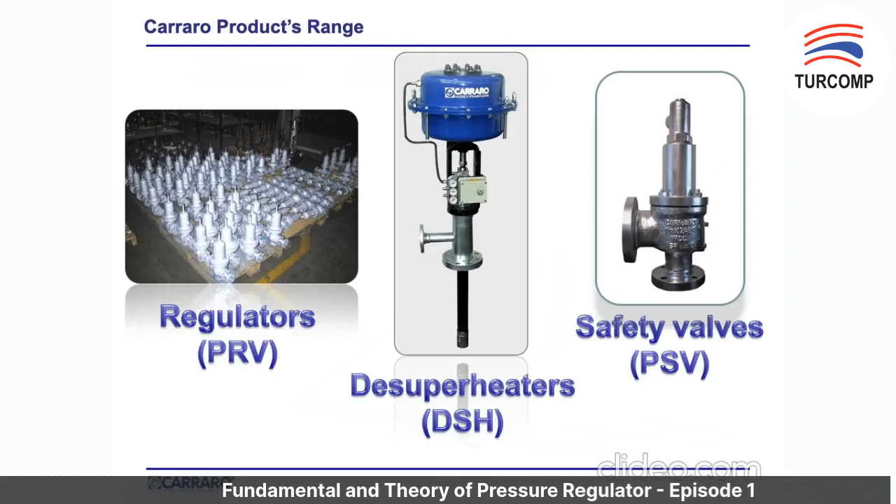The general concepts presented here cover all types of regulators supplied by Carraro. Some models are going to be discussed in great detail, so let's start by saying what a regulator is, and in particular what a self-operated regulator is.

The regulator is a self-contained mechanical device which is activated by the fluid flowing through it, so it's the process fluid. It's a device whose primary function is to match the flow of the medium flowing through it to the demand for this medium placed upon the system.

At the same time, the regulator must maintain the system pressure within certain acceptable limits. They represent essential and crucial items for adequate control of pressure in the plant and its application, especially in markets like oil and gas, power, chemical and petrochemical, and general industry.

Carraro regulators are suitable for each kind of medium, dangerous and not dangerous, like for example oil, aggressive fluids, steam, air, gas, water, and liquid.

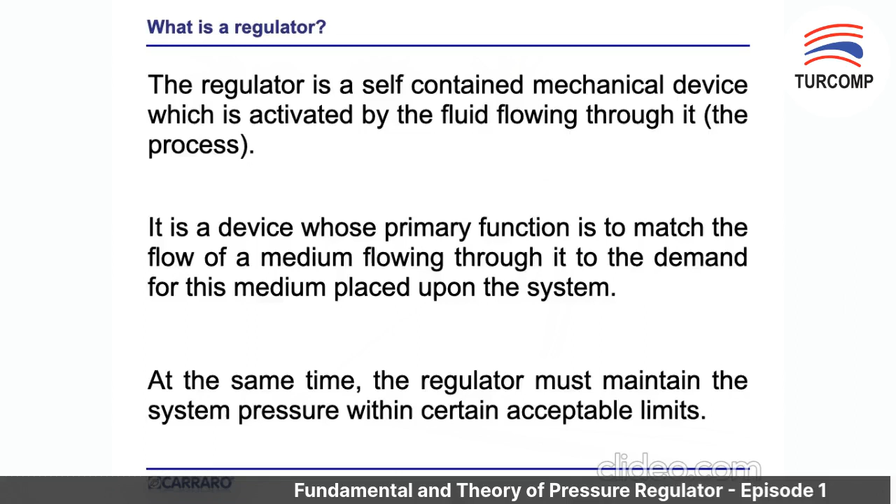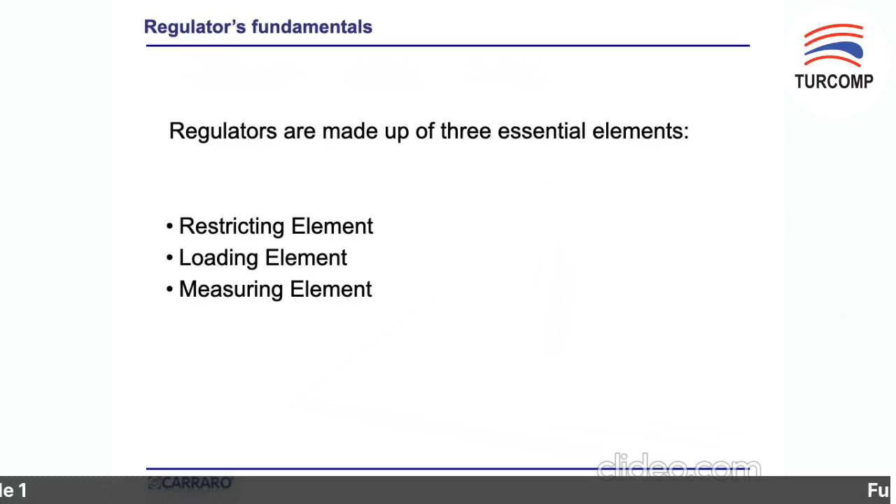Regulators are made up of three essential elements: a restricting element, a loading element, and a measuring element. They are all mechanical components, so all the regulation is mechanical. Since the regulator's job is to modulate the flow of the fluid into the system, one of the essential elements is the restricting element that will fit into the flow stream and provide a variable restriction that can modulate the flow.

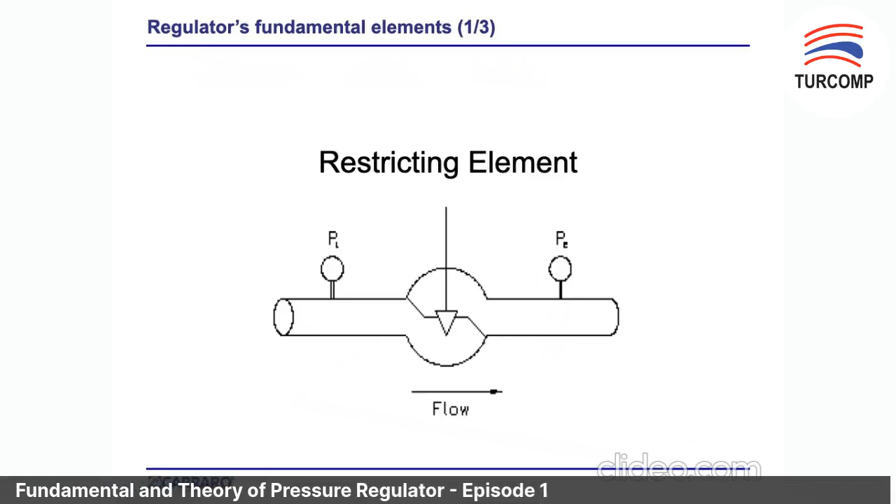This slide shows a schematic of a typical regulator restricting element. For a globe valve, the trim is composed of the seat, the disc, and the plug. It operates a variable restriction that can modulate the pressure and consequently the flow of the fluid through the regulator.

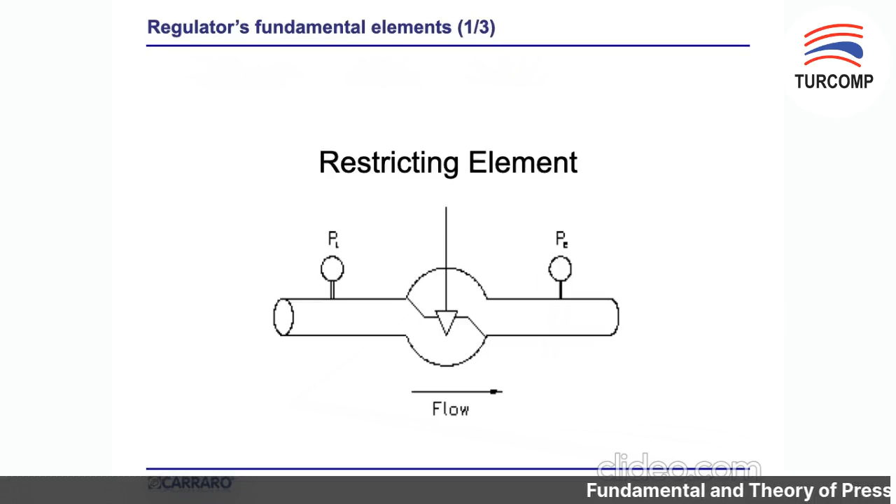In order to cause the restricting element to vary, some type of loading force will have to be applied to it. Thus we see that the second essential element of a gas regulator is a loading element that can apply the needed force to the restricting element.

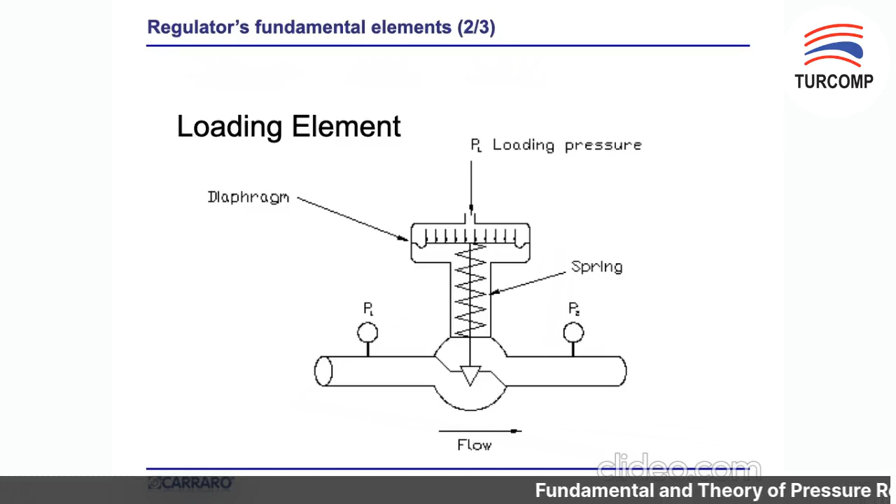The last element is the diaphragm, which works as a measuring element that tells us when regulator flow is the same as user flow. At the variation of the pressure, the diaphragm compresses or releases the spring to deliver more or less fluid into the system.

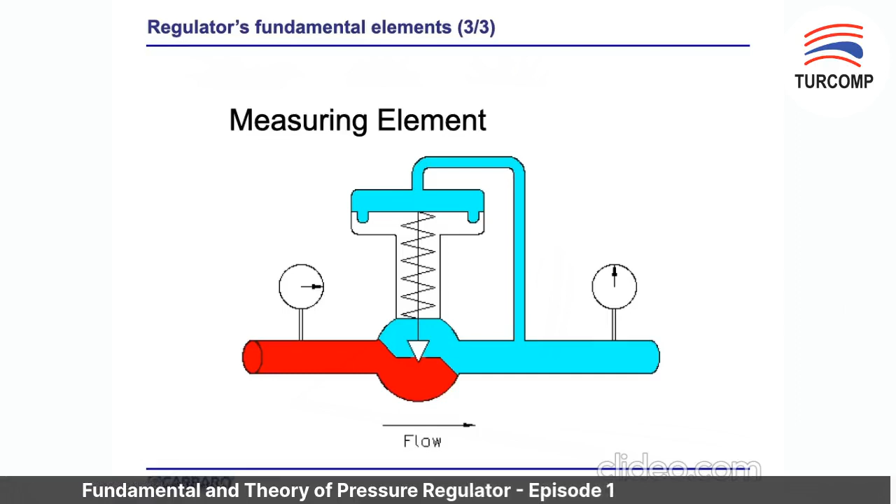It's important to understand that a pressure regulator does not regulate the flow directly, but through the variation of the pressure we measure the variation of the flow, because controlled pressure and flow rate are linked together - thus changing flow changes pressure. This example illustrates that there are three essential elements needed to make any operating gas fluid pressure regulator.

They are, as already seen, a restricting element, a loading element, and a measuring element. Regardless of how sophisticated the system may become, it still must contain these three essential elements.

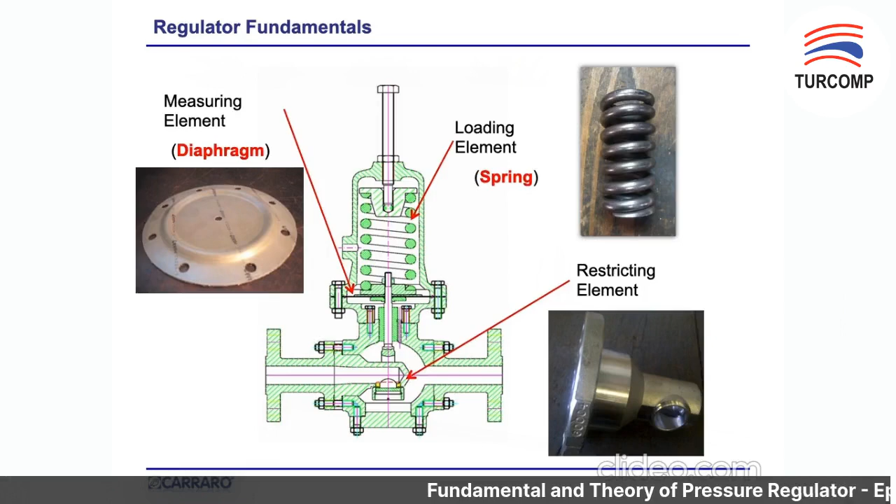But why use a regulator? Engineers agree that the simpler a device is, the more reliable it is. Every component has a probability of failure, and the probability of failure of a system is the sum of the probabilities of all its components. The fewer and simpler the components, the lower the failure probability. Regulators are simple, so they are cheap, and they require simple maintenance, so they have low servicing cost.

Regulators are self-contained and self-operated control devices. They don't need any type of external power supply, transmitting instruments, or control instruments. A regulator's speed of response is quicker than a control valve, which for some applications cannot react fast enough to changes, potentially causing serious issues during operation.

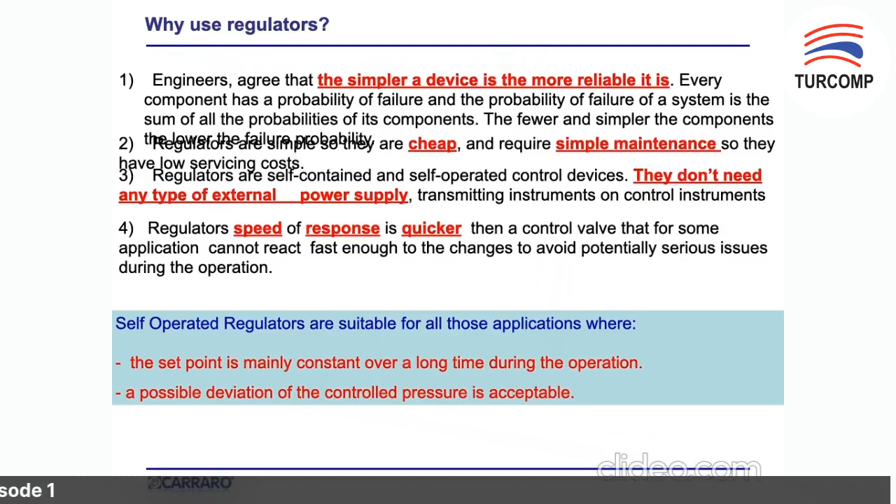Finally, self-operated regulators are suitable for all those applications where the set point is mainly constant over a long time during operation, and a possible deviation of the control pressure is acceptable.

In this slide, you realize the main difference between a regulator and a control valve. Note that in the common feedback control loop, in addition to the control valve, a pressure transmitter and controller are required, as well as an external power source, either air or electrical. With the pressure regulator, the process pressure supplies the power, and the regulator becomes transmitter and controller in one device - a much simpler, cheaper alternative.

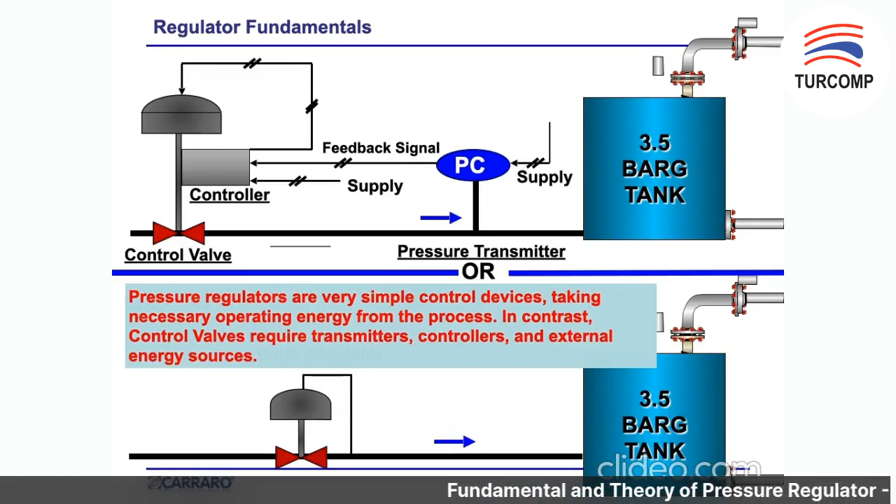Always when the process allows. So, in a way to recap and be more clear about the difference between a regulator and a control valve, we can see here a quick comparison.

You can choose a regulator because it's self-contained, has a fast response speed, is a simple device, is a compact device, is easy to install, and is easy to maintain.

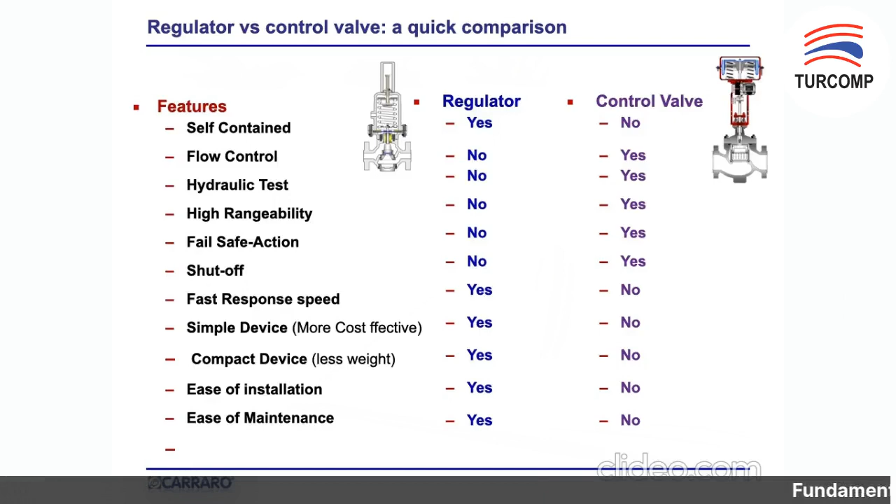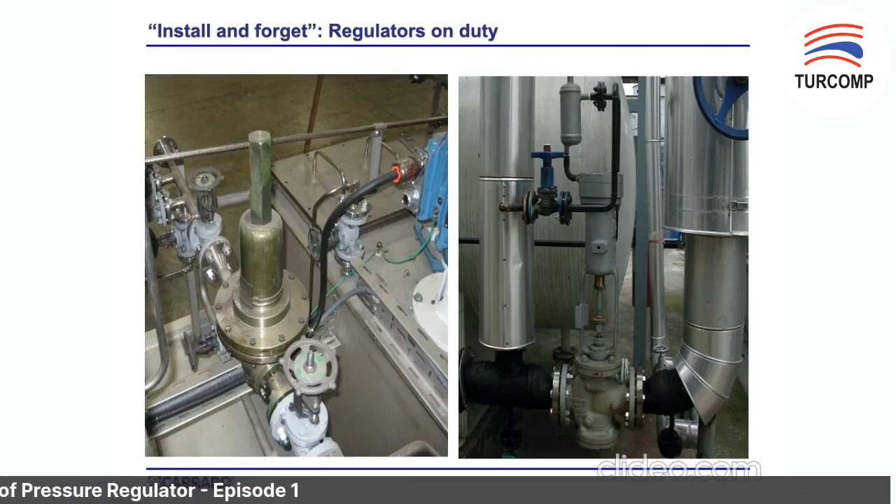This slide shows us why for our regulators we can say 'install it and forget it.' As already mentioned, our regulator is self-activated. It's activated only by the fluid passing through it, so it's not necessary to have any external source, power, or signal connected to the distributed control system. This way you can install it far away from the plant and it's able to work for many years without any special maintenance.

I will start with a brief terminology section dealing with regulators and process control. We start by looking at the main types of regulators, obviously direct operated.

Pressure reducing regulator: a valve that satisfies downstream demand while maintaining a constant reduced pressure. Back pressure regulator: a device that controls and responds to changes in its inlet pressure, usually operating open. Pressure relief valve: a valve that opens and closes to ensure pressure does not rise above a predetermined value, usually operating closed.

A pressure relief valve is actually the same device as a back pressure regulator, but with a different purpose. They both regulate the upstream pressure, but while the back pressure regulator throttles, the relief valve has to open at a certain set pressure, similarly to a safety relief device.

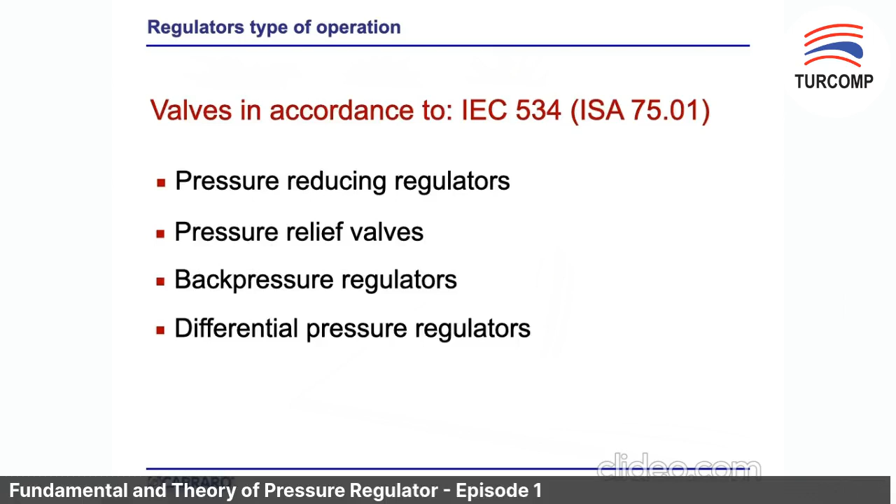But pay attention, a pressure relief valve is not a safety relief valve. They have different ways of working, different standards, and different purposes. A safety valve is the last protection of the system and has a pop action function.

Now we are going to see in more detail pressure reducing regulators. A pressure reducing regulator maintains, as already said, a desired downstream pressure while providing the required flow to satisfy the load or user demand. This pressure maintained by the regulator is the outlet pressure setting, the set point of the regulator.

Direct operated regulators are the simplest devices available for downstream pressure control. They are available with internal or external pressure sensing and can have a flow-to-open or flow-to-close design. Direct operated pressure reducing regulators can be designed only with a spring-to-open layout, so the only possible failure modes are spring failure, where the regulator closes, and diaphragm failure, where the regulator opens.

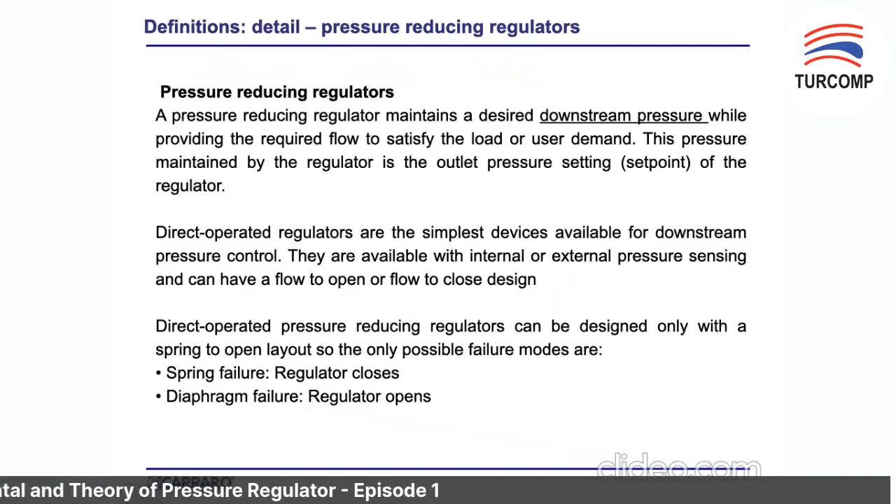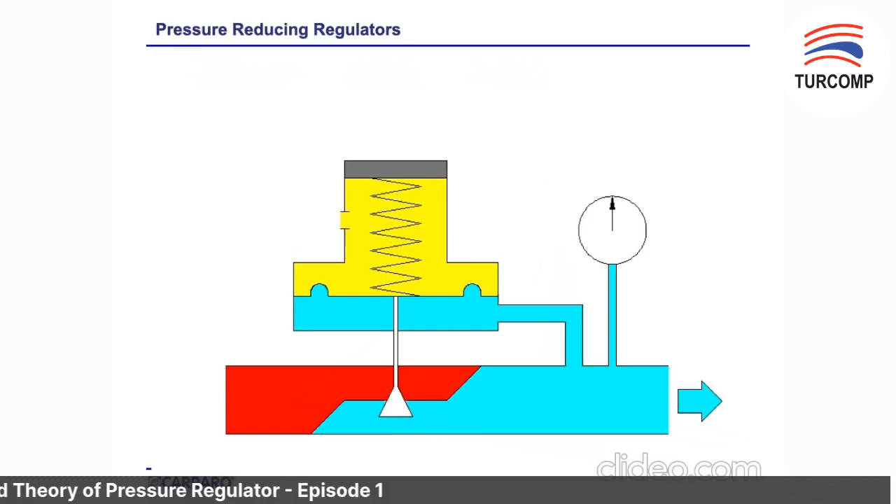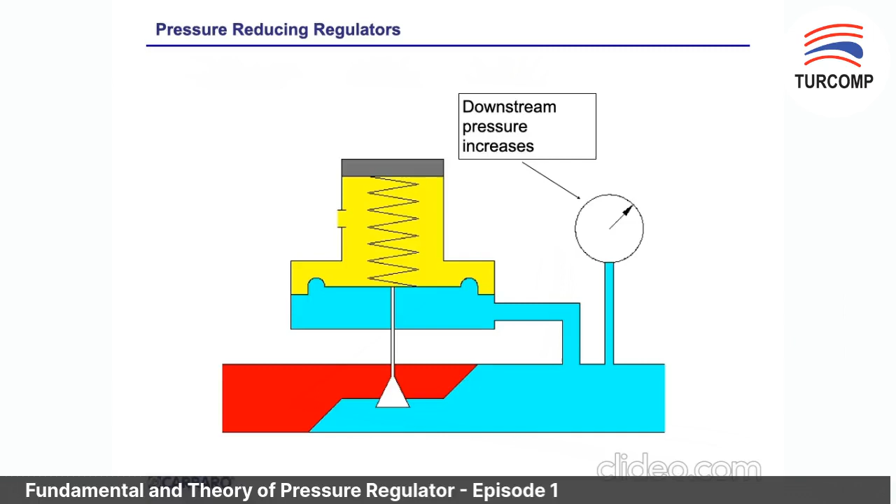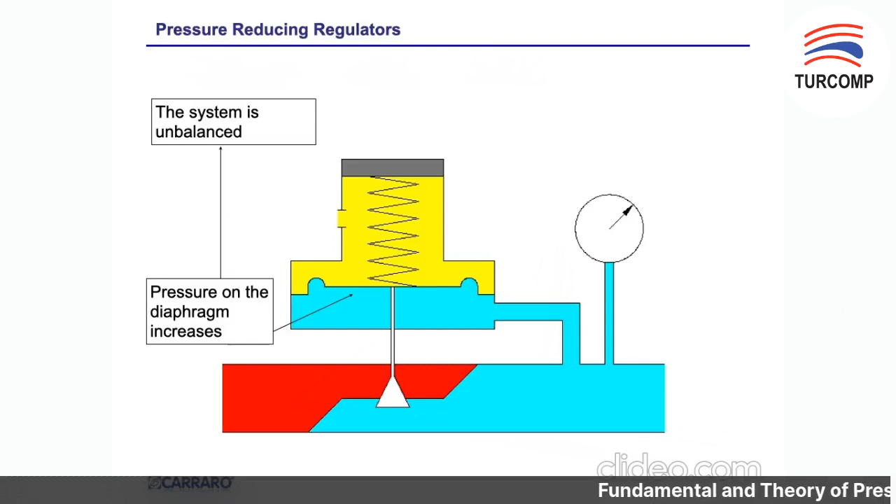Otherwise, when the downstream demand decreases or stops, the downstream pressure increases, so the pressure on the diaphragm increases, and the system is once again unbalanced. The spring is compressed, causing the restricting element to move up, delivering less fluid or locking up.

Now let's see in detail relief and back pressure regulators, which are the same devices. The different name is determined only by the application. Starting with the relief valve, a pressure relief valve limits pressure build-up and prevents overpressure in a system. The relief valve opens to prevent a rise of inlet pressure in excess over a desired limit. The pressure at which the relief valve begins to open is the relief pressure setting.

Otherwise, a back pressure regulator maintains a desired upstream pressure by varying the flow in response to changes in upstream pressure. The upstream pressure maintained by the regulator is the pressure setting, the set point of the regulator.

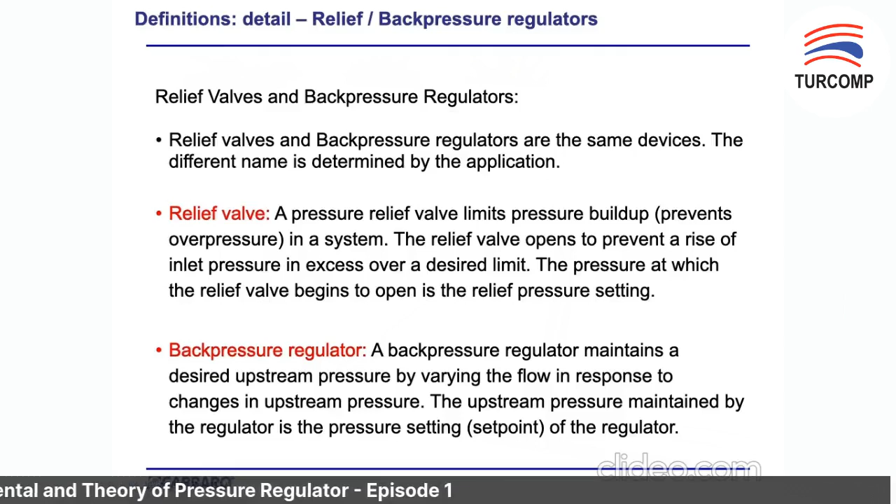Now let's see again what the set pressure is in a relief valve or in a back pressure regulator. In a relief valve, the set pressure is the pressure at which the relief valve begins to open. In a back pressure regulator, the set pressure is the pressure at which the regulator supplies the requested operating capacity. Remember always that a relief valve is not a safety relief device.

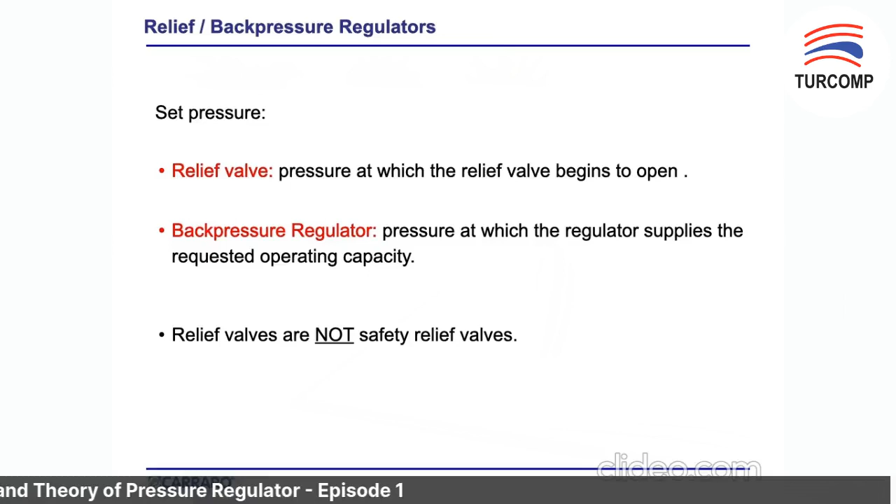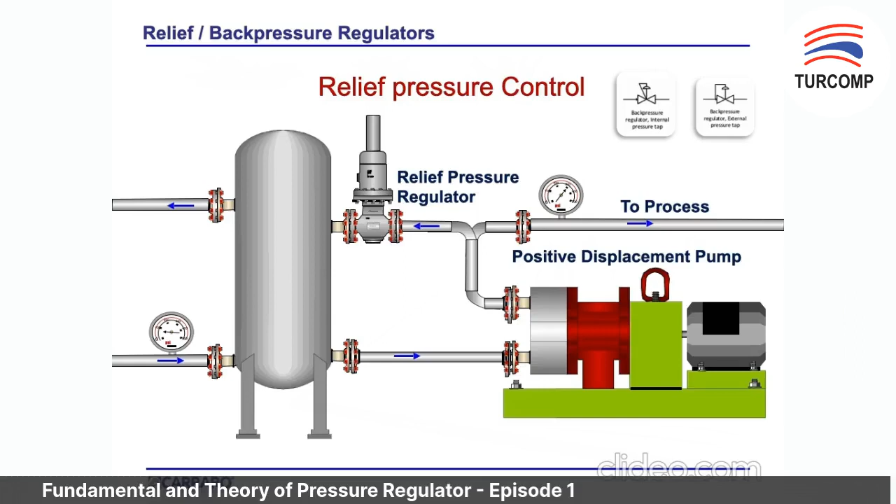We can see now in this slide a schematic example of a back pressure regulator installation, and in this case it regulates the pressure from the pump to the tank.

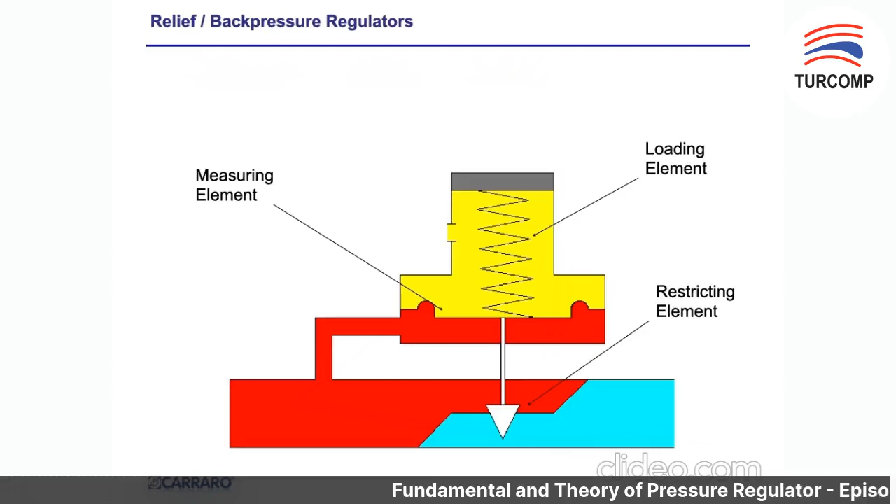In this slide we can see once again the main elements of a pressure regulator, and we can see that the main mechanical feature that defines the nature of a regulator is the behavior of the spring related to the trim. In a pressure reducer, the spring pushes to open the valve. If the spring acts to close, it's a back pressure or relief valve.

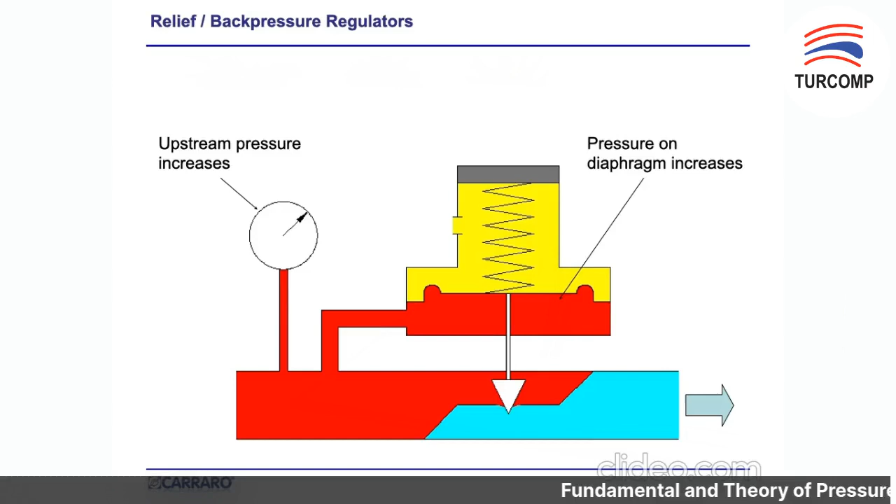Now, thanks again to this animation, we will try to understand how this device works. When the upstream pressure increases, the pressure on the diaphragm also increases. The system becomes unbalanced. The spring is compressed by the diaphragm, causing the restricting element to open and thus deliver more fluid.

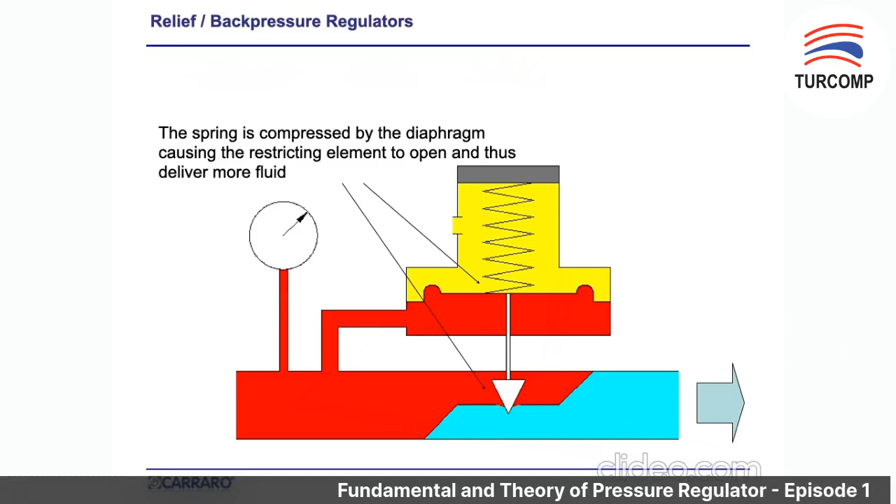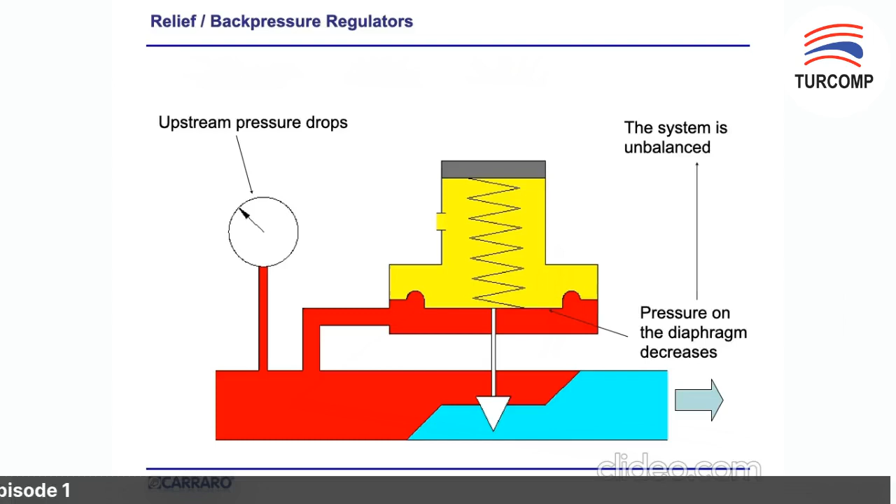Otherwise, when the upstream pressure drops, the pressure on the diaphragm also decreases. The system becomes once again unbalanced. The spring pushes the diaphragm downward, causing the restricting element to deliver less fluid or lock up.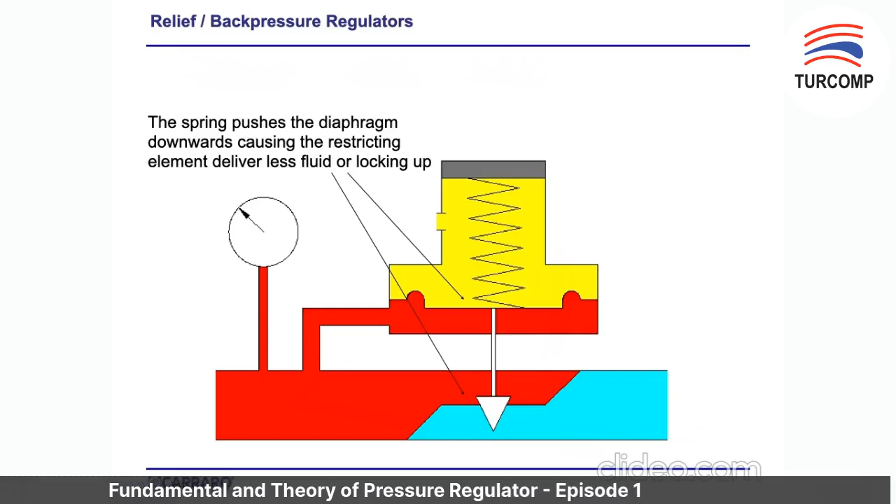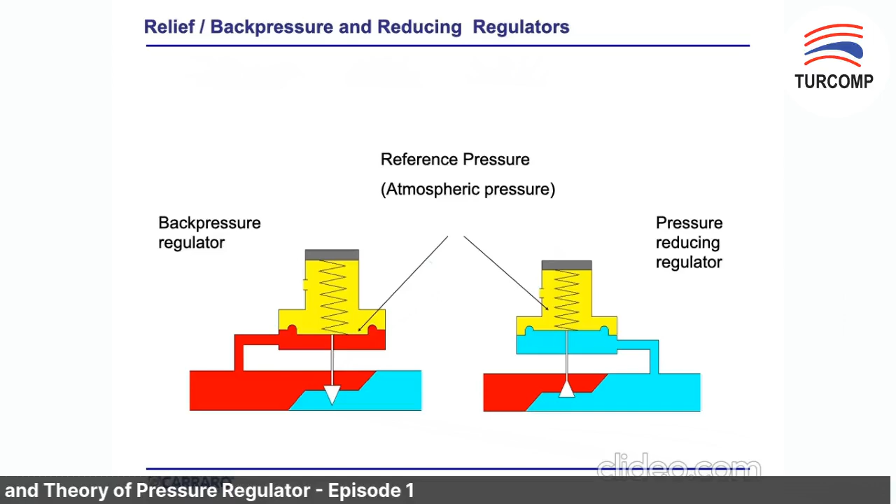Shown in this slide, which is common to relief, back pressure, and reducing regulators, is that on the top of the diaphragm there is atmospheric pressure, which in this case is the only reference pressure.

After this slide we can start to talk about the last function of a pressure regulator, the differential pressure regulator. A differential pressure reducing regulator maintains a desired downstream pressure with respect to a reference pressure other than atmospheric, while providing the required flow to satisfy the load or user demand.

Otherwise, a differential pressure back pressure regulator maintains a desired upstream pressure with respect to a reference pressure other than atmospheric, by varying the flow in response to changes in upstream pressure.

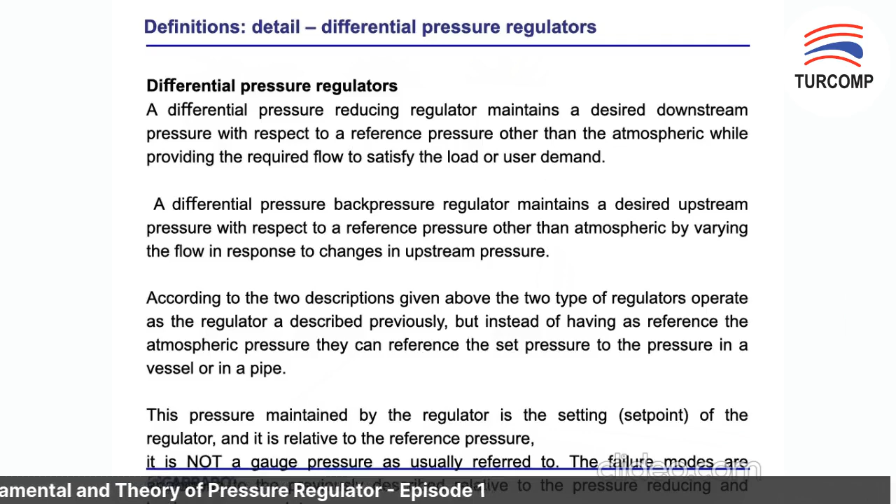According to the two descriptions given above, the two types of regulators operate as described previously, but instead of having the atmospheric pressure as reference, they can have the reference set pressure to the pressure in a vessel or in a pipe. This pressure maintained by the regulator is the setting, the set point, and it's relative to the reference pressure. It's not a gauge pressure as usually referred to. The failure modes are analogous to those previously described relative to the pressure reducing and back pressure regulator.

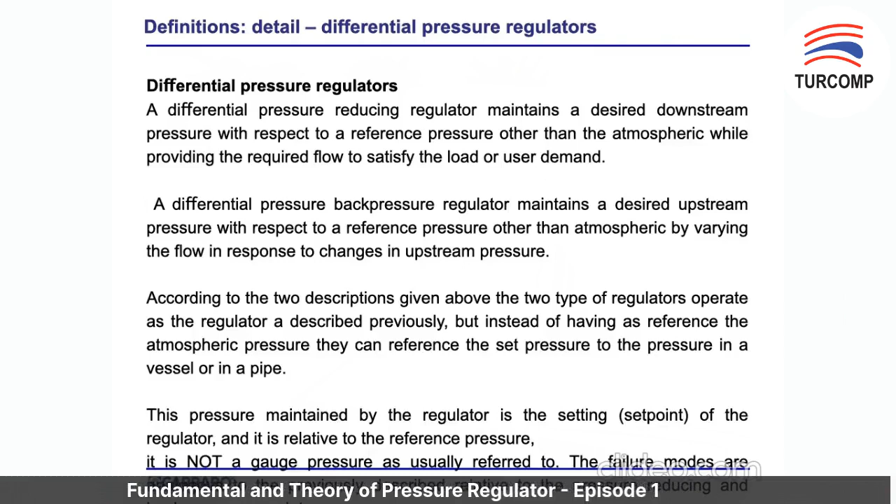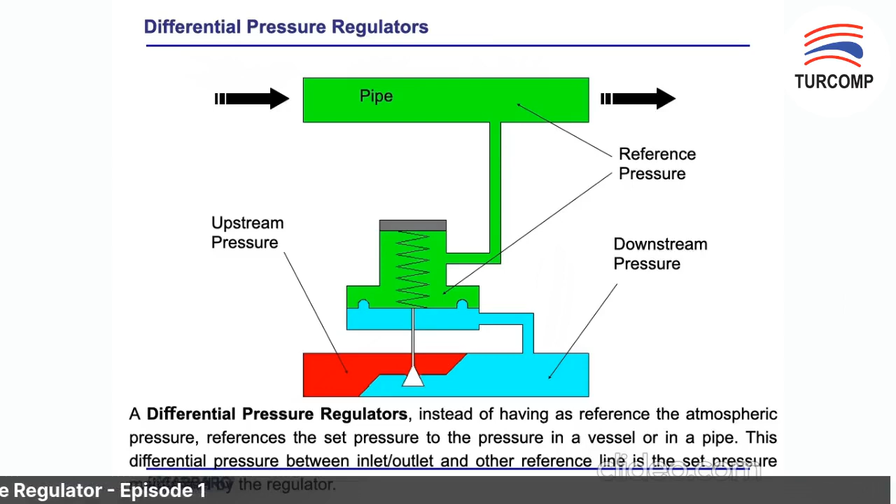In this picture we can see how a differential pressure regulator can work. We can see in red color the upstream pressure, in blue color the downstream pressure, and at the top of the diaphragm we have in green color the external pressure reference to another pipe or a vessel. In this case, the differential pressure between inlet-outlet and the reference line in green is the set pressure maintained by the regulator.

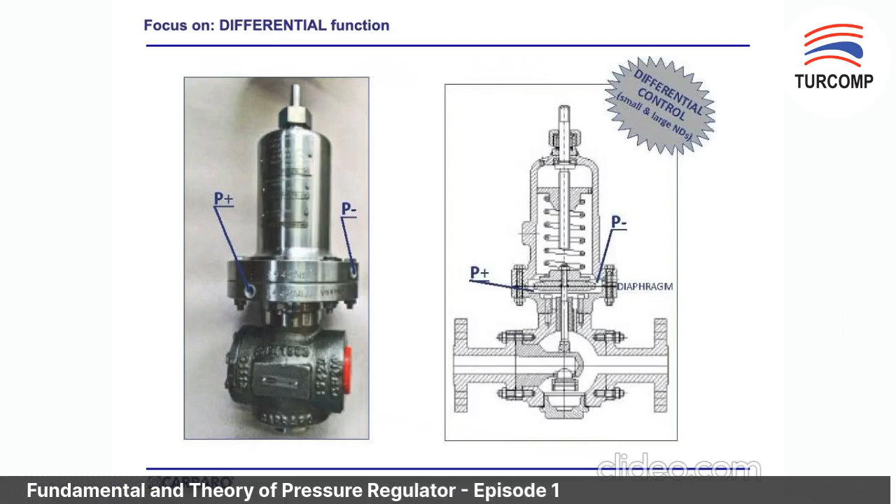In this real image you can see the two pressure sensing points for a differential function. In this example you can see the required connections, one on the lower diaphragm case and one in the upper diaphragm case, that is the external pressure sensing that goes into a vessel or another pipe.

Now we can introduce another concept, that is the pressure sensing, that can be external or internal. The difference is simple. In the first picture, the valve pressure sensing is internal. As you can see, there is a small channel that connects the lower body to the actuator chamber under the diaphragm, so the valve is able to sense the outlet pressure internally.

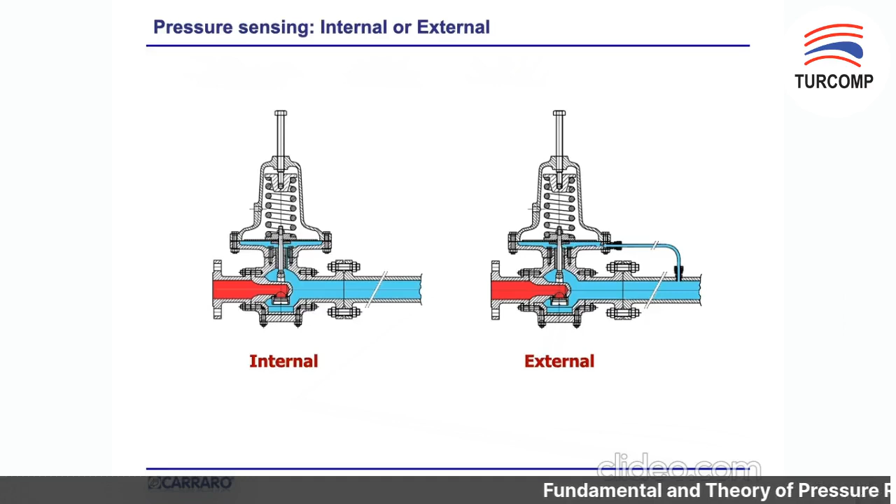Instead, in the second picture on the right, the pressure sensing is external. You can see the channel tapped and external tubing connecting the lower diaphragm chamber with the piping. We are able to select both solutions, and this depends on the specification requested by the customer of this product or by the fluid properties.

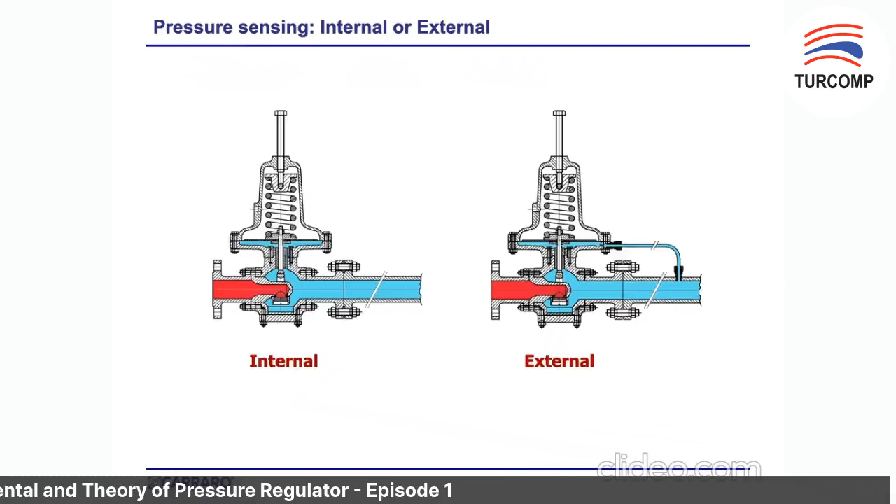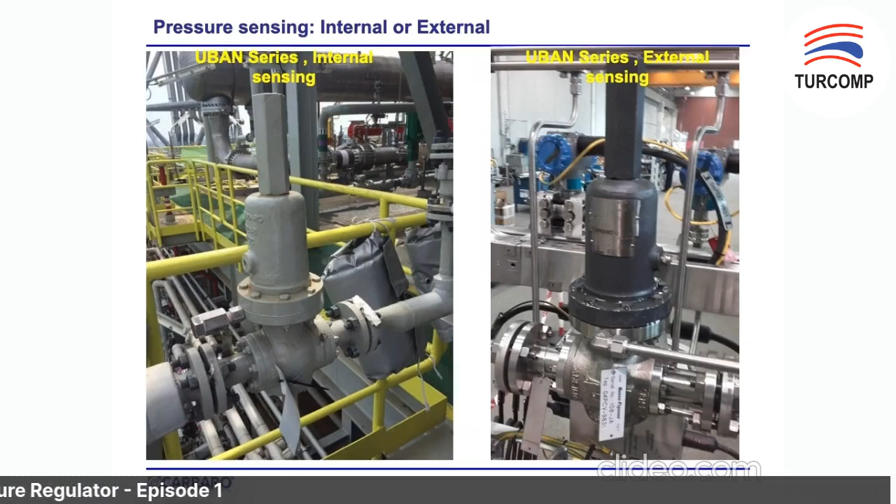These last slides show two real photos of the Uban series, that is a pressure reducing valve installed, the first with internal sensing and the second on the right. You can see the piping with the external sensing pressure.